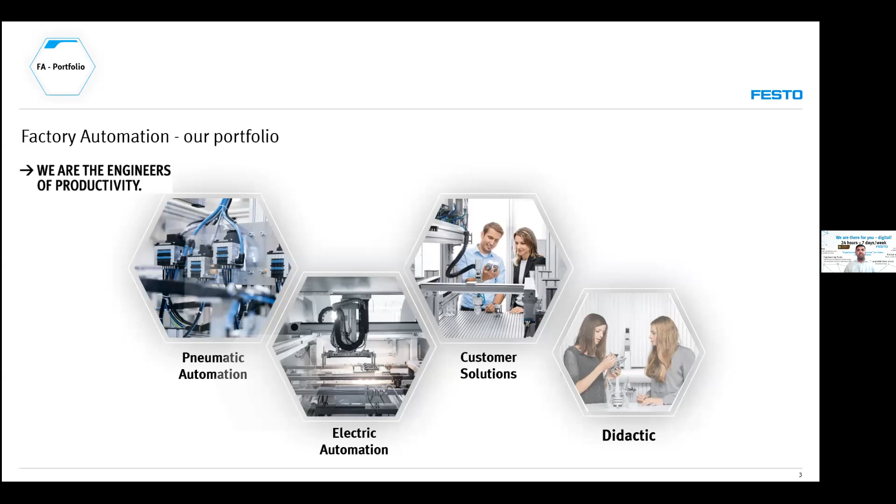So these are the main four portfolios that we have at present in Festo. Along with that, we cater to various business segments: biotech and pharma, food and packaging, automotive industry, technical education, electronics and assembly, medical technology, laboratory automation, water technology, and chemicals.

A large part of our growth comes from automotive and food, but our new business is developing very dynamically. Recently, the electrical market and light assembly have gained pace, and along with that, we have life tech products with medical technology and lab automation.

Not to mention, Festo Didactic with its qualification offer for Industry 4.0 always helps us develop not only the products, but also the people in the organization, who are trained with the help of our Didactic 4.0.

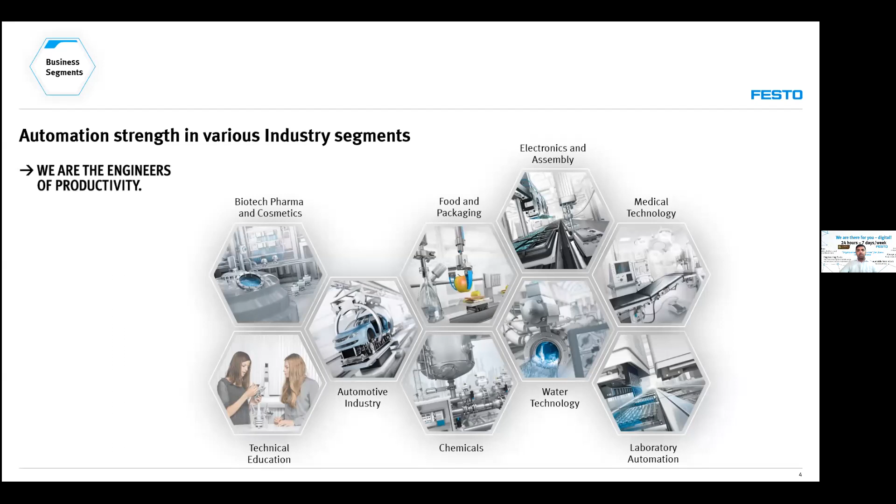So coming down, we can proudly say that Festo has now become a one-stop provider for factory automation. These are the various linear developments we have made. Initially it was catalog components - singular components like cylinders and valves - then catalog modules like valve terminals which can be configured. Then individual modules which can be integrated along with the PLC and operated. Then control panels and control cabinet systems, then high-speed handling systems, and then ready-to-install solutions.

When we talk about these control cabinets, high-speed handling systems, and ready-to-install solutions, they are included in the control cabinets individually, and they also take into account specific industrial requirements such as those in the food and automotive industries. Whatever standards have to be followed for a particular industry will be catered to accordingly once mentioned to our design department. The design is also influenced by local conditions such as weather and climate.

Along with that, it is not only Festo components that we use for these solutions - we also integrate third-party components so that it is operationally tested and delivered ready to install directly, where you can plug and play the entire system.

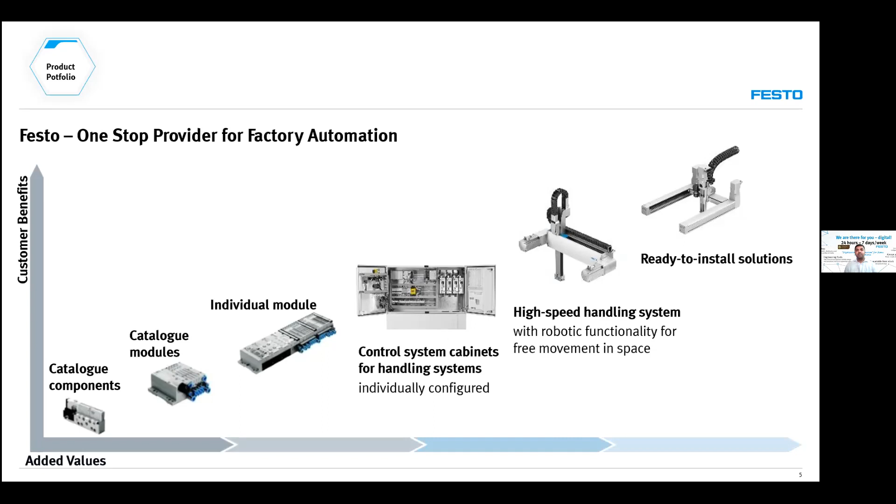So saying all that, I move to the second segment, which is our core concept of this seminar today, which is digitalization and automation.

First, to start off, any company needs its own digitalization strategy to move towards digital transformation and Industry 4.0. There are three basic steps that need to be followed. The first is digitization, which is basically the process of changing analog to a digital format. Then comes digitalization, where you use digital technologies to change a business model in order to provide revenue. So digitalization is the use of technologies to change a business model and provide new revenue and value-producing opportunities. It is the key process to moving towards a digital business.

Then comes digital transformation. Digital transformation drives the entire portfolio of your digital business into three different segments. The first segment focuses on external focus, which is your customers. The second segment is your internal focus, which is your own operations. And the third segment is the entire digital transformation, which involves digital businesses and digital business models.

So what exactly is this digitalization strategy? To be specific, this digitalization strategy focuses only on technology and not culture. Digital strategy is relevant to all the changes in the business model that need to be taken so that the business becomes digital. Setting down a strategy is the key component to any transformation process. Any business transformation process will require a specific strategy so that it ensures we follow the model to achieve the end objectives of the business. So that is what this digitalization strategy is.

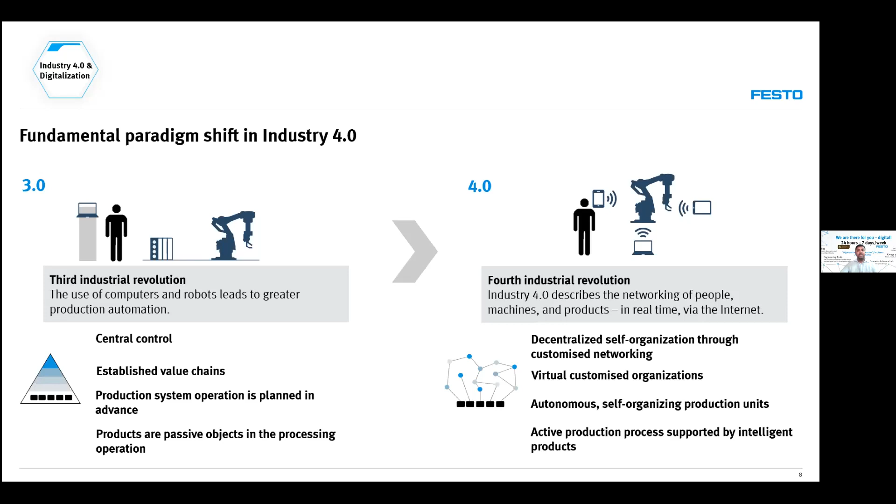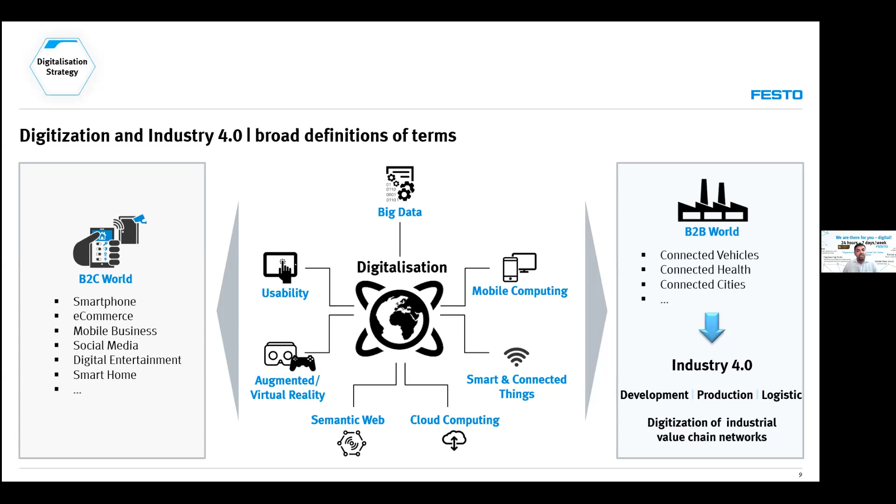Smart products are those which are clearly identified physical objects with intelligent and communicating abilities. A product with intelligence, networking, and communicating ability is termed a smart product. So our first direction is thinking in the way of smart products.

Through these smart products, we can be able to get smart services. What are these smart services? Getting generic here, these smart products related to automation will be able to cater to the following services.

We can assess the overall equipment effectiveness, process performance, product quality, energy monitoring, manufacturing performance, and production traceability. These are some of the smart services which help in the next process of the business, which are combined offers. These smart services are always there, but then they can be combined.

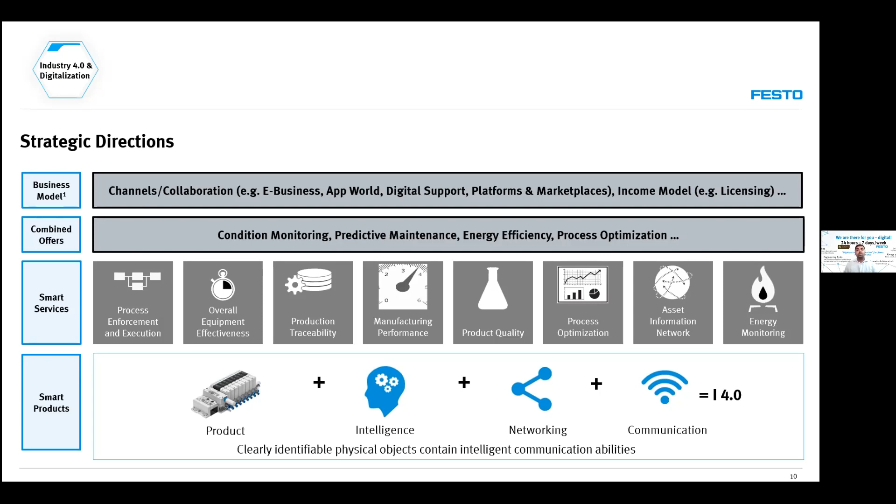Coming down to the first step of digitization. As I mentioned previously, digitization is converting analog to digital. This would be our first step towards the transformation from Industry 3.0 to Industry 4.0.

Industry 3.0 had products, then field devices and control devices, then stations, work centers, and enterprises. The main challenge was the field device getting interconnected to the control device. The product was isolated, the field device was isolated, and the control device was also isolated.

Now what do we have to do for this interchange? The same physical objects and equipment are now fitted with sensors, actuators, and integrated intelligence. So these become integrated systems.

Once the integrated systems are equipped with networking technologies like internet communication, machine-to-machine communication, wireless communication, and semantic description, these integrated systems become cyber-physical systems.

Once they become cyber-physical systems, we introduce new IP connectivity which can connect to the internet. So these cyber-physical systems now become smart products because they have the ability to communicate, network, as well as do their own functionality.

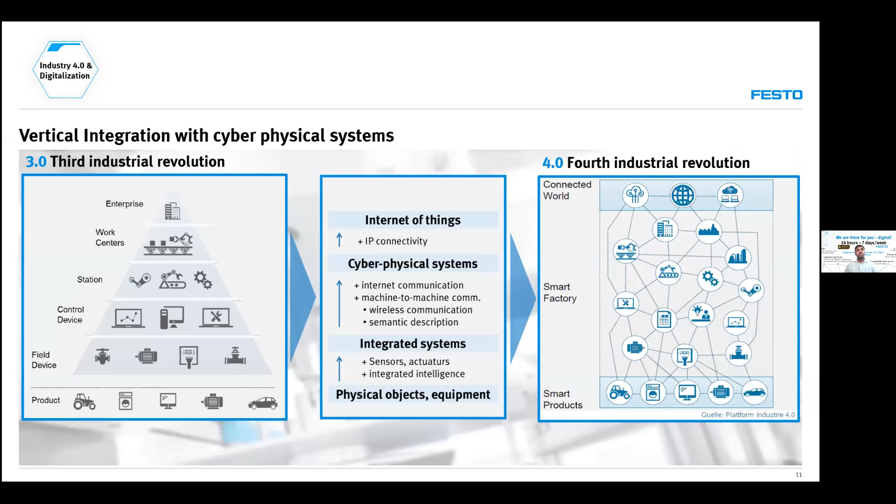So the transformation from Industry 3.0 to Industry 4.0 is all about smart products. The smart products used here have the ability to interconnect, whereas ordinary products in 3.0 are not able to interconnect and had to follow a definite hierarchy.

With smart products and interconnectivity, the hierarchy has to be configured by the user himself so that he can attain or reach whatever path he wants. So it's all about interconnectivity in the meaning of smart products.

Then the use of smart products and interconnectivity is what intertwines to become a smart factory. This smart factory can then be used to connect to the external world, and these become new business models generating new revenue for customers and organizations.

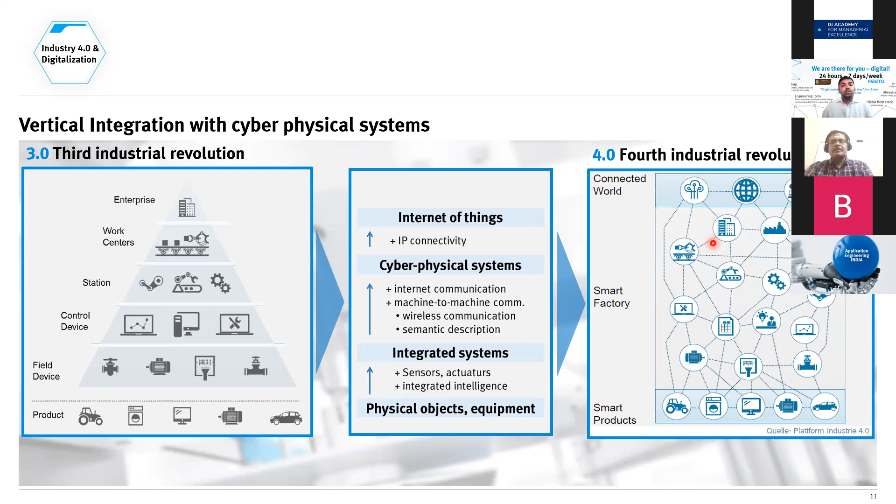So in order to do that, what exactly do we need with the help of our digital infrastructure? The transformation takes place from products to smart products.

Whenever there is a smart product, there is connection and integration along with IoT, the Internet of Things. We have an IoT gateway and certain libraries required for the smart product to communicate to the IoT gateway.

A brief description of this IoT gateway and the smart services will come up in my next slide. What we're basically planning to do is take all the raw data and transport it to an IoT gateway with the help of libraries and protocols such as OPC UA.

Once transmitted to the IoT gateway via OPC UA, this IoT gateway uses an AMQP telemetry communication to send it to a particular dashboard.

This dashboard can be user developed, developed using our software engineers within our organization. With the help of the dashboard, we can collect vast amounts of data, which can be used for visualization as well as data storage.

Once that is done and we have all the data, we move on to historic and aggregate data, which can be accessed globally.

Right after the IoT gateway, we'll have so much data coming into our systems that we might need to move our platform to the cloud. That is where this IoT gateway helps us.

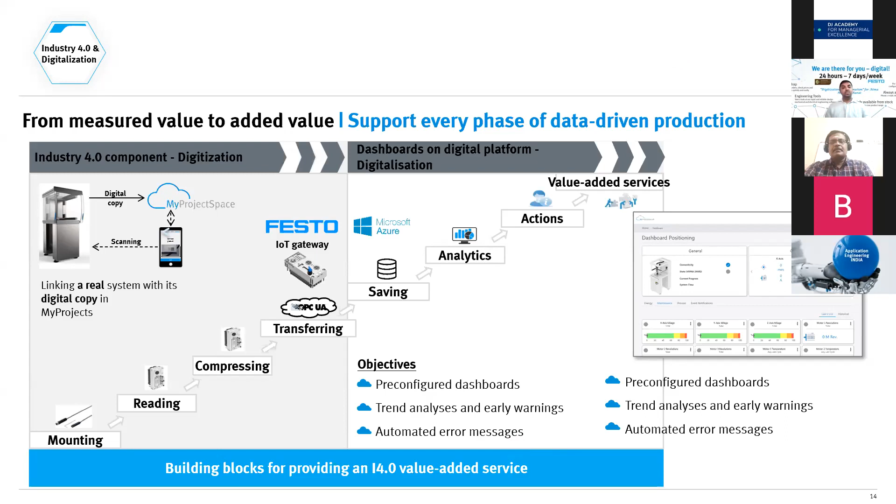So what is the benefit? Digital transformation, as you see, is more about people rather than digital technology. As I said in the beginning, once we embrace this digitalization, what are the benefits that we get? It is a long-term investment in productivity and efficiency, and it secures us through growth and innovation leadership.

As you can see, we can embrace this digitalization with the current portfolio. With digital products and services, we can have new business models. We can have a digital customer journey. We can set up digital infrastructures. We can build our own value chains. These are the various benefits that we get with the help of digitalization in the industrial value chain.

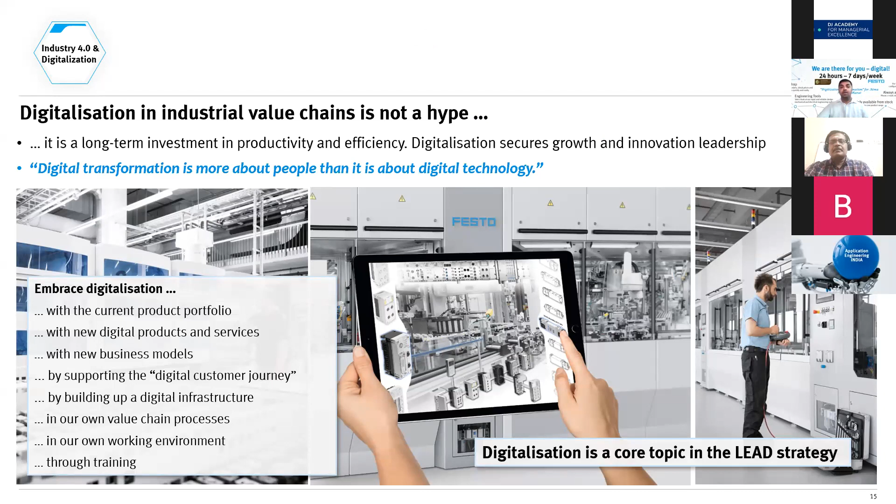What is the benefit to our customers through this digital transformation? Here you have a digital journey which enables the customer to make contact through numerous platforms.

We can have a touch point through ePlan or eClass. We can have a touch point through Google. We can have a touch point through various social media platforms like Facebook, LinkedIn. The customer can also have product-related data on YouTube.

Once this touch point takes place, the customer can also search. He can select products. He can size products. He can configure products with the help of the website, the internet platform. He can have different tools available with the associated product.

Those tools help them in searching the catalog, where they get all the 3D data and 2D data, enabling them to design and configure systems properly.

Then when it comes to the purchase department, it is very useful for them when it is going to be a rebuy. When they buy a product they have already bought in the past, all they have to do is give the part number, and the costing along with delivery time would be communicated to the purchase department through online and digital software services.

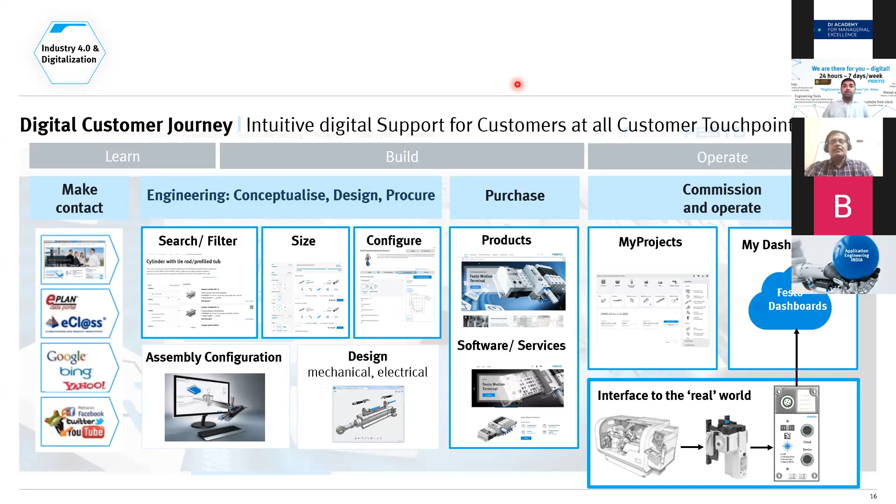So coming down to business models, this would be one of the business models that you can create with the help of the Digital 4.0 journey. So as you can see, you can have an app world, an application platform where you have your own products that arise out of the cyber-physical transformation that you have made.

And there can be n number of apps and many types of apps that can be developed for catering to the needs of your customers as well as your internal customers. So it can be mobile apps that can be accessed through tablets, Android, iPhones. It can be cloud-based and web development apps for motion analysis and data analysis.

It can be desktop apps for dimensioning, simulation, engineering. It can be PLC-based apps for smart press, smart configuration, condition monitoring, smart programming. It can also be firmware apps for plug and play, for force distance control, condition monitoring applications.

So there are n number of opportunities that are available once we have this transformation from digitization to digitalization, and then in our journey towards digital transformation.

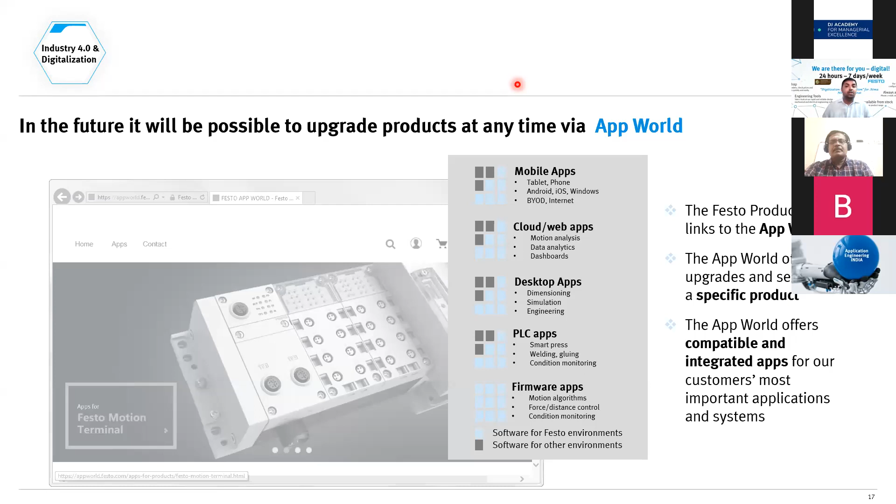So this is what digital transformation is all about. As we already told you, digital transformation is not about the products, it is about the culture of the business organization. So as you see, it is mainly driven by forming a separate business unit like electric automation or IoT business unit.

So what that business unit would do is develop IoT-enabled products, embedded softwares, the latest technologies that are involved in device data. What are the latest connectivity options that are available? What are the major software suites that have to be procured or developed in order to cater to our digital business or digital transformation business?

Next comes your digital products and services. So what are the apps that we have already built? What are the capabilities of those apps? How are those new business models going to arrive? What are we going to do with those business models? How are we going to promote them? So that would become a new digital business.

So the third thing would be digital infrastructure. Once we are ready for this digital transformation, we should be able to have a firm digital infrastructure. We should be ready for the cloud. So this would be hybrid and scalable.

So these infrastructure processes vary from your IT strategy. IT strategy is majorly about upgrading your IT systems and upgrading your information technology systems, whereas this digital strategy is totally different.

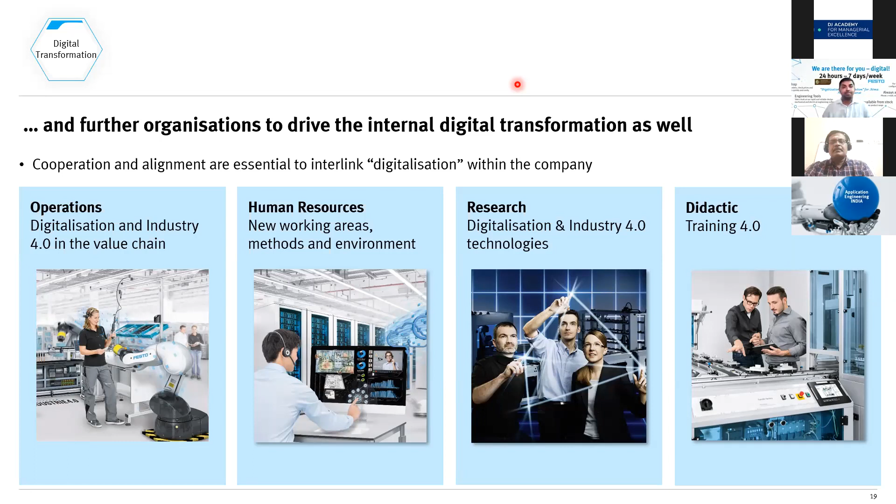So with this, I have a small application or suggestion on why an interconnecting network of things benefits everyone. This is a scenario we face in our day-to-day lives: the traffic signals presently there. These signals were mainly designed for one main reason, to prevent accidents.

Now, what if we bring an intelligent cyber-physical system to these traffic signals? We can achieve the following capabilities. Once this becomes a cyber-physical system, it acts according to data, which comes from various parts. A person sitting inside his car can also access that data coming from this cyber-physical system, so we can foresee that there is more traffic at this particular signal.

So if we have almost reached the signal, we can brake optimally, which improves energy efficiency. Then if we already know there is so much traffic at that signal and it would take more time, the car can choose another route, which is adaptation.

Then we can have a separate business model if that cyber-physical system can say that at this point in time there will be no traffic always. So we can have a green corridor for traveling at that particular time through this signal.

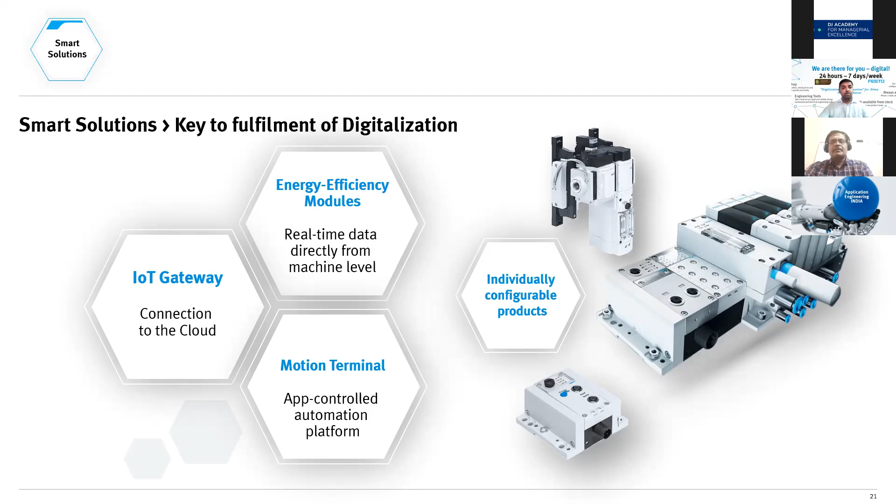Let us start off with our energy efficiency and digitally monitored technology. As you can see here, compressed air is under control with the help of this energy efficiency module. It is an intelligent combination of a service unit. A service unit is nothing but your filter regulator unit. So what we basically do here is add intelligence and integrate it along with the flow control, a pressure regulator, and a pressure switching valve.

Along with the pressure measurement device, ultimately what happens is the normal filter regulator unit that you use on your shop floor becomes a cyber-physical system by integrating all these additional components.

Then after the addition of these components, that's happening. So if you see, it is more than a conventional service unit by now. We are actually intervening in the air supply, and we are measuring at the same time. Automatic monitoring also takes place once the flow control and pressure regulation happens.

So here, it is not only the module that is suitable for energy efficient machines, but it can also help us collect data and stay connected with a simple connection of sensors to the PLC. So how it can be made to work is something like this.

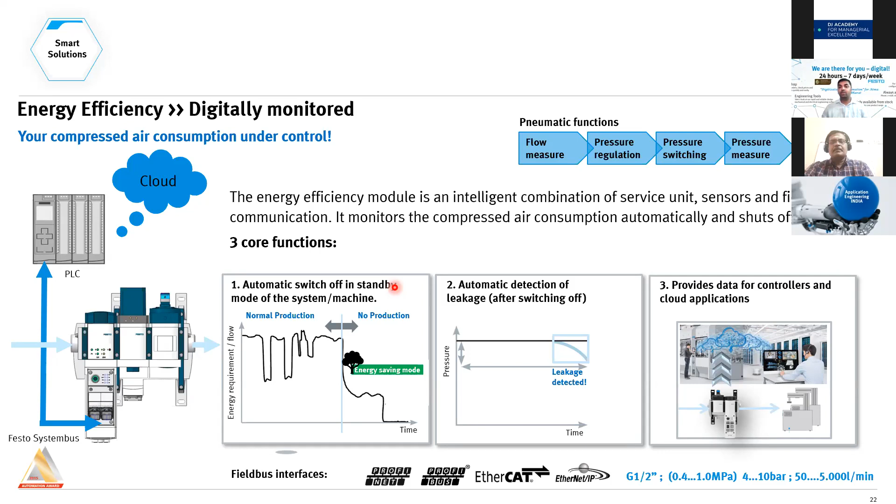All the data collected here is then fed to the controllers for cloud-based applications. After collecting the data and feeding it into the cloud-based applications, what do we get? We get a new business model.

As you can see here, we can take control of the total pressure supply, what is happening in the air consumption, how much is the total flow, what are the total air savings for that particular day, and what is the actual pressure it is operating on.

There are numerous data points and parameters that we can see with the help of these digital dashboards. Digital monitoring is also possible with the help of graphs or predetermined set point graphical items.

Along with this, we can also see the production that happened yesterday, last week, last month, and what were all the major breakdowns that were happening.

So these are various touch points that these digital dashboards can help us with, in terms of visualizing data and correcting our processes in order to bring down energy consumption and improve efficiency.

This particular thing is not only for this service unit, it can also be used for servo motor controllers and dashboards. You can see what is the link voltage in your servo motor controller, what is the torque in your motor shaft, what are the various statuses, what is the position of your electrical axis, where it is positioned, and what is the current status of your controller. All this can be monitored with the help of these digital dashboards.

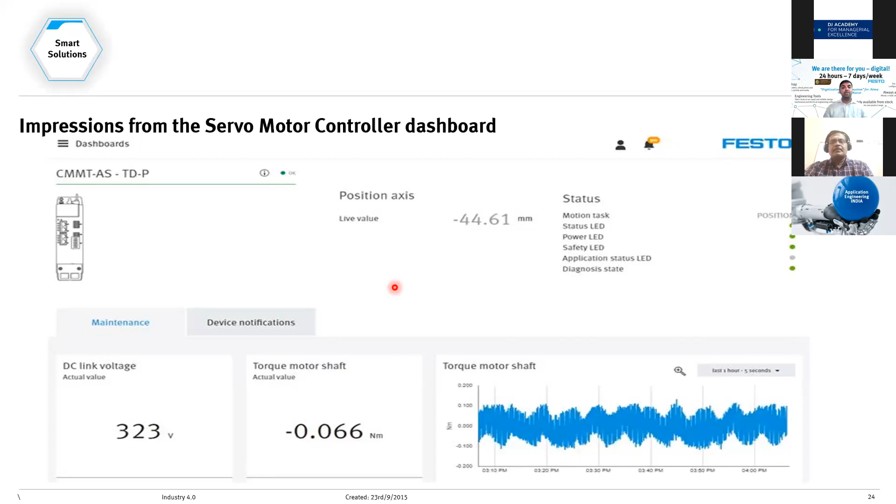It is not only through these specialized modules that energy efficiency measures are taking place, but also through other means. In organizations, you have application engineering departments which help you in sizing machines and tools so that it helps in enabling your energy efficiency measures.

Going digital makes system design and component layout easier. You have hundreds of components that need to work out optimally, and going digital will help put them together and work correctly.

In order to do that, we have to do engineering and simulation just to find out the right solution, which will help us with key data. So when selecting a product, if the right automation solution is found, it can be helpful for energy efficient engineering and configuring data for automation.

So how do we do that? On the product side, we can bring about energy efficiency in many different ways. The first thing would be to reduce friction.

One thing would be to choose the right components with the help of, for example, a motor with a holding brake for long standstills, then you can reduce weight. For example, if you're sizing your robots or Cartesian handling systems, the main thing would be the payload that you're going to operate with. So once your payload comes down, you will have an optimum selection of products that can reduce weight and enable energy efficiency measures.

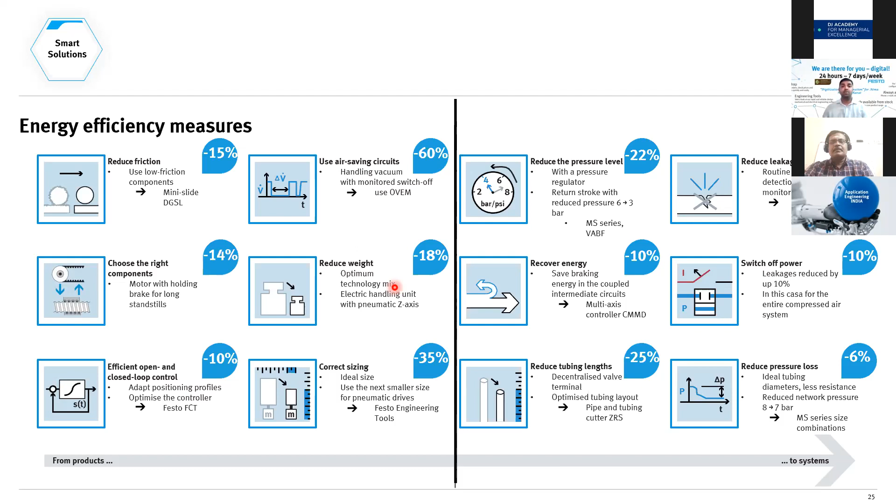In the long term, if correct sizing is made, for example, to move a mass of around 12 kgs with a stroke of 250 mm, what is the difference if we choose a 40 mm dia cylinder versus a 32 mm dia cylinder? If we choose the correct sizing with a 32 mm cylinder, we can save up to 34% in terms of energy savings.

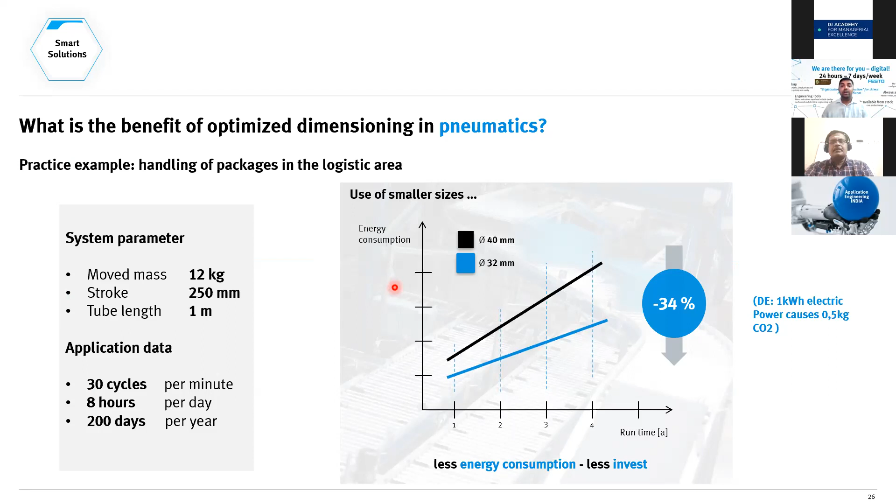So how are we going to achieve this energy savings in terms of valve terminals? Earlier we had the centralized installation and valve terminals, which were up to 60% efficient and channel cost reduced by 50%. Earlier we had an individual valve for individual cylinders, then we came up with the concept of valve terminals with centralized installations. Now we have decentralized installation systems, where we reduce cycle time up to 30% with very short tubing. Space has reduced up to 70% and air consumption has reduced up to 50%.

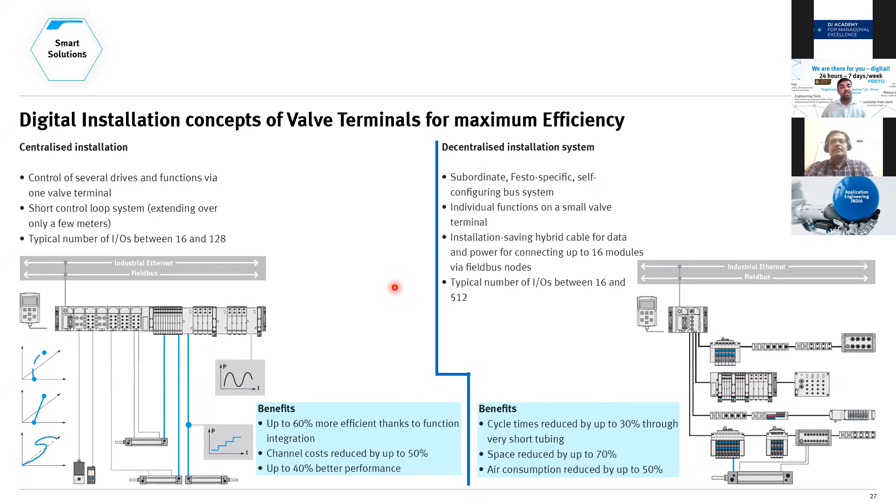So what are these centralized and decentralized installation systems? A centralized installation system is nothing but all your connections going directly to the centralized PLC or centralized system. It is one logical processor operating to control n number of cylinders. Then came the modular system, where we had a separate module helping control these valves and valve terminals, placed very close to these valves and valve terminals.

Then comes our decentralized system, where we have individualized monitored valve terminals and logical control units. A logical control unit can be placed quite adjacent to your valve terminal in the decentralized system. All this can be communicated to a centralized server unit, which can in turn communicate to your PLC with the help of field bus systems. Then comes your hybrid systems, which is a combination of modular and decentralized systems. So in today's world, with the help of decentralized and hybrid systems, we are able to reduce our carbon footprint through these energy savings.

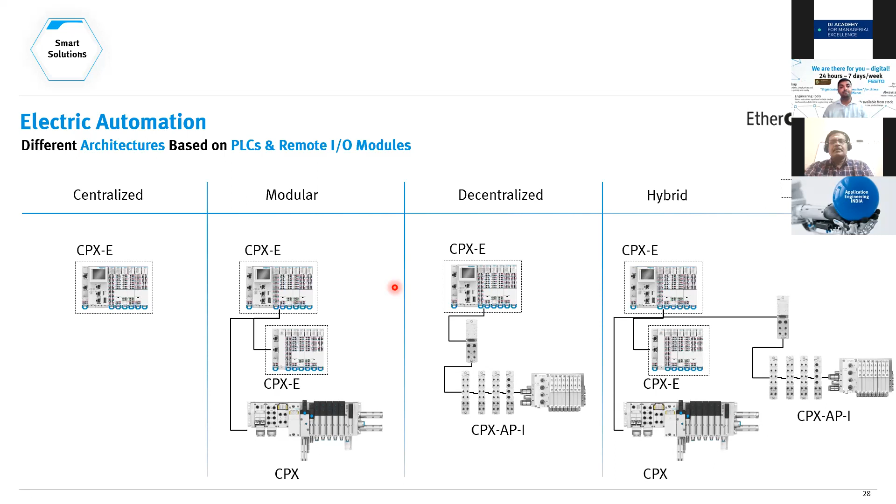So now what are all the data that we serve? What are all the data required for all these processes? With the help of these products, we can get parameter data, that is how the system is going to be set up and configured, what field buses it requires, what various connections it requires. Then we have diagnosis data, that is what is happening in the system.

Is the system on or off? Is there any malfunctionality? Then we have smart data, which are the condition counter of your coils and actuators. All this helps in determining if your valve is on or off.

Then we have process data, that is the inputs and outputs. The PLC gives the correct status of your input and output, whether the input signal is on or off, whether there is an output signal going out from the PLC or not. Then we have asset data, which is nothing but your total product information. Asset data has your product key, your product information, like what is the product, what is the part number of that product, what are the technical specifications of the product.

So these are various data that a particular cyber physical system or module has, that can be sent to the cloud in order for us to send it to the dashboard and monitor things properly.

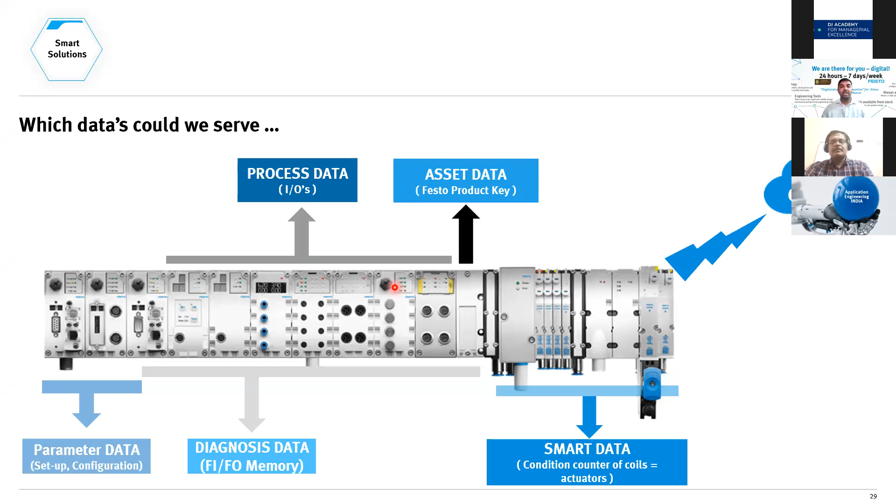Then comes our IoT gateway. This IoT gateway automatically discovers the various devices connected to it over the motion terminals, the energy savings module, or the handling systems. It communicates to this IoT gateway using OPC UA.

Once the data is collected to the IoT gateway, it communicates to Microsoft Azure. This is a separate cloud platform available from Microsoft, and all your data can be serially collected and stored in Microsoft Azure with the help of AMQP, a telemetry communication protocol.

Once your data is collected and stored in Microsoft Azure, you can take it to various cloud platforms like MindSphere, Festo Cloud, or other cloud platforms with different cloud protocols. The main thing to consider here is the communication model: OPC UA and AMQP.

Once that is done, the condition monitoring libraries help us filter and aggregate the interesting data required and send it to the cloud. The benefit here is reducing data costs and optimizing network traffic.

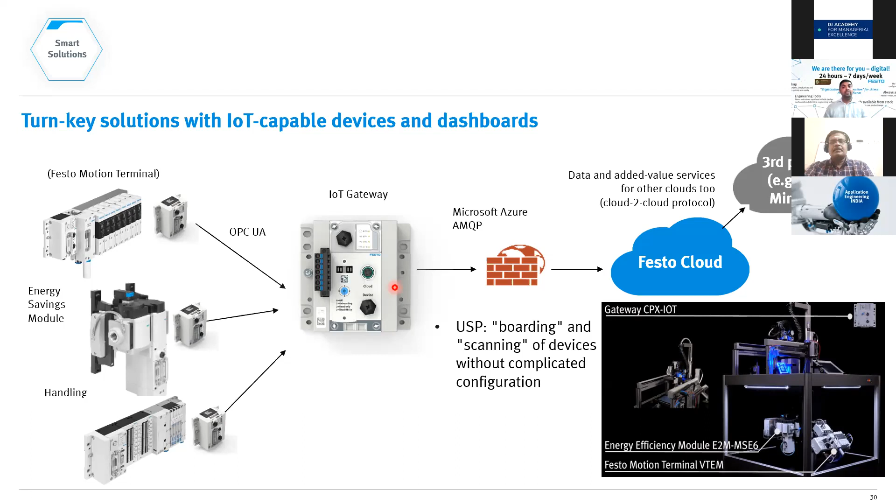Then comes the question: is Industry 4.0 and digital transformation only for new machines or new products? Well, what these products can do is, with the help of retrofit, provide a gateway or door opening to an entire new world of digital transformation.

What we can do is retrofit our existing shop floor and machine tools, irrespective of the number of machines. It can be multiple halls or different sites.

Energy monitoring can take place with the help of your FRL system. You can collect all the data, and it helps you reduce your carbon footprint, not only for new machines being built on your shop floor now, but also for machines that were working in the past for more than 30 to 40 years.

So all those machines can be retrofitted with these smart devices, and ordinary internet and Wi-Fi is possible with these smart devices, which help in the transformation of these machines into digitally transformed machines.

And also your conventional assembly systems can be retrofitted in the same way.

It is not very hard in the conversion of these machines that can be retrofitted, because existing field bus systems and existing controllers with PLCs remain, and hence it is only the field devices that make a difference, so you can retrofit existing shop floors at no additional costs.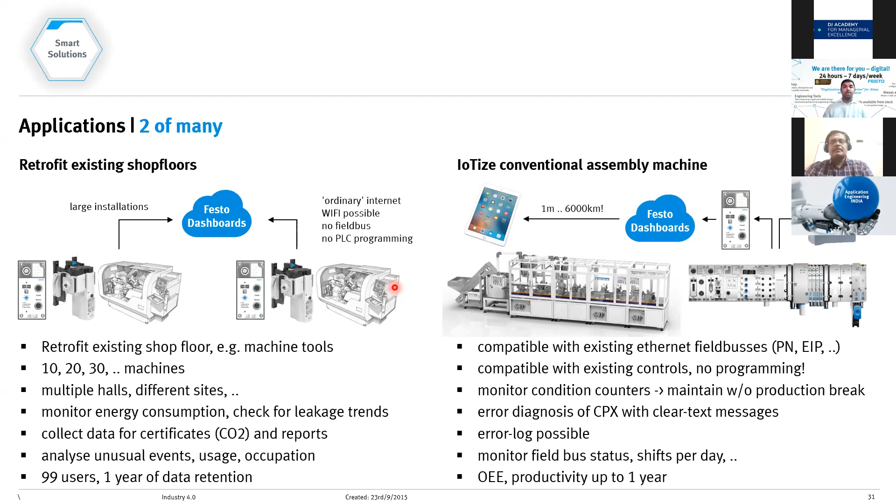Now, coming down to one more product which combines the simplicity of pneumatics with the advantages of electric automation. This is a plug-and-work solution where you have ball screw systems and tooth belt axes that come internally with a combination of stepper motors.

These are plug-and-work solutions where once you determine the stroke lengths and speed, it has an input module that can be programmed on the system itself. Once you input your stroke lengths and speeds, it can operate on a point-to-point basis as per your input, without additional external servo drives, as all the electronic components are integrated into this drive.

So this is a complete solution for simple movements between two mechanical end positions. It does the same functionality as your pneumatics, and no special expertise is required for commissioning. It comes with a programmable HMI where you can program your stroke length, your speed, and your communication.

It can also directly connect to your PLC, and with the help of the PLC you can command and run this particular product. It also has capabilities of digital input/output and IO-Link, so through that you get the advantages of a pneumatic system combined with electric automation.

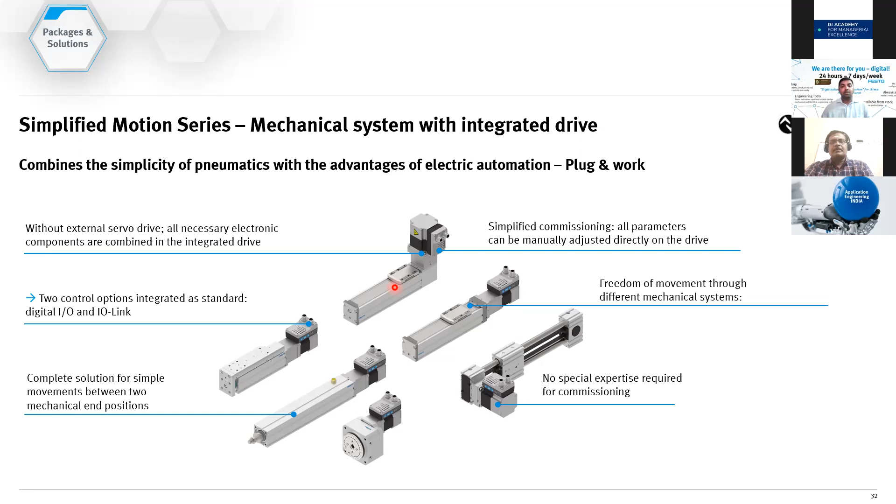Then coming down to the various architectures that we have right now, previously everything had to go to one particular place and all the connections had to go there. But now, as you can see, it has a lot more capabilities.

Depending on the module combinations, the PLC can be configured. It can be purely a remote IO system, purely a control system, or purely a remote IO system without any inputs or outputs. It can be only a PLC for motion control or for running servo motors and controllers. So all this is possible in this present world.

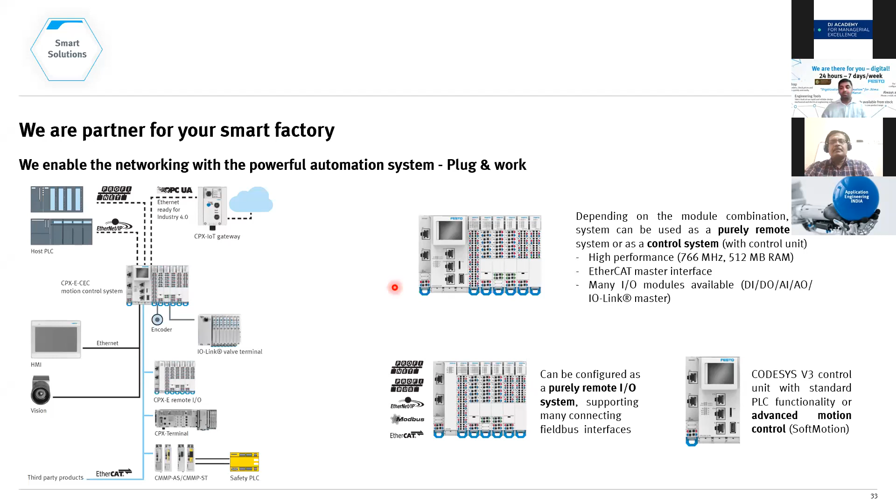So coming down to our last segment, which is on IO-Link. As you can see, it can have the capability to communicate wireless. And when it comes down to exchanging data without cables, the first preference would be IO-Link through WLAN.

With the help of IO-Link, we can send serial bidirectional data from field devices to your control unit. So as you can see here, we have the field devices, which is the valve terminals. With the help of IO-Link modules, we can communicate it to your PLC, and from there you can collect data through your cloud modules. It can be used in all types of field devices nowadays, like sensors, actuators, and a number of mixed signals are also possible with the help of IO-Link.

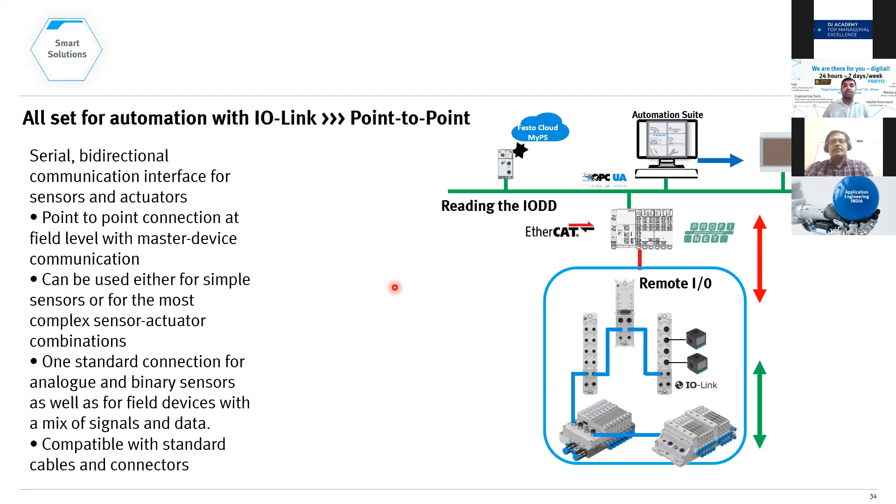So what are the benefits of IO-Link? Your parameterization is made very simple. Your investment is safe because these are standard products with plug and play capabilities. They have very less downtime and higher productivity. Less downtime in the sense, for example, if a sensor is malfunctioning and has to be replaced, we have these IO-Link master modules which directly connect to the new device and parameterize itself within a matter of minutes, so your downtime is very, very less, and it is very simple to install because the complicated wiring of the sensor actuator is not a major factor of hindrance here, which is the pure benefit of less downtime and higher productivity.

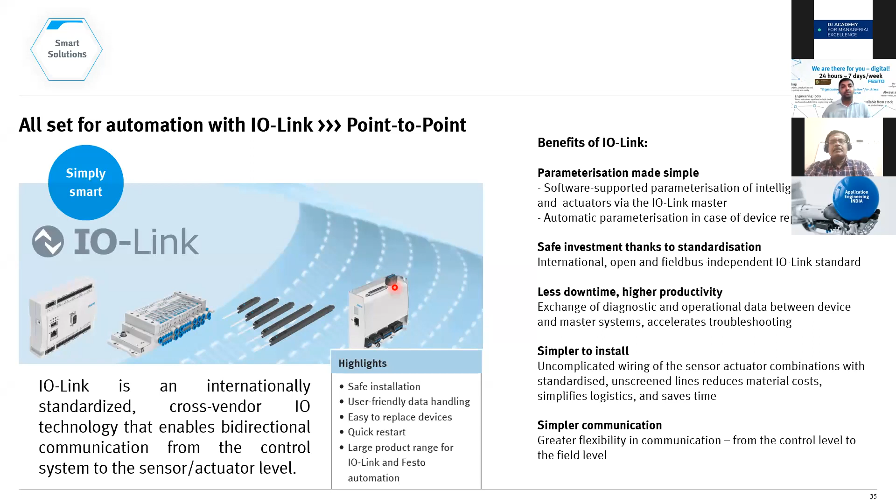Coming to our digitized pneumatics, the first product I would like to speak about is the digitized pneumatic balancer. In earlier days, we had zero gravity balancers, which had no safety in the first case, and a very skilled operator was required to operate that balancer, because whenever there were different loads, we needed to switch the pressure depending upon the load by the operator. So when loading takes place, there would be more load on the balancer, and when unloading happens, the load on the balancer is much reduced. Every time the operator had to switch the pressure depending upon the load.

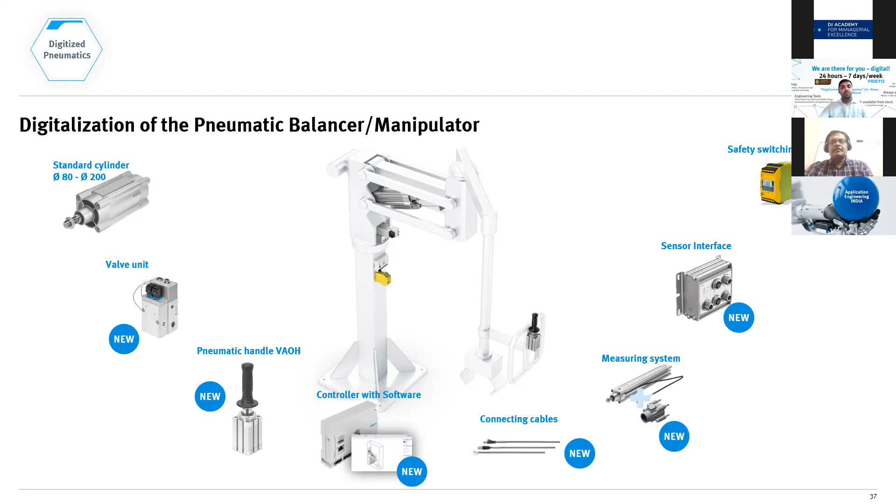So this becomes a really flexible closed loop system, and the operator's work is only handling. These components are suitable for all types of systems, including kinematic systems. This is the advantage we get from a pneumatic balancer which is digitized. These cater to n number of applications, as you see here, such as handling of door panels, axles, tires, batteries, etc.

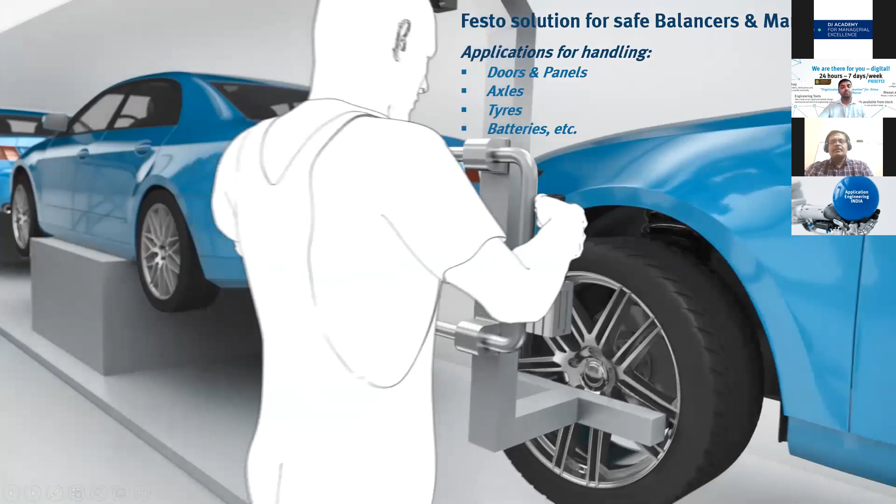Coming down to the next topic on digitized pneumatics, we have this motion terminal, which can position freely over the entire working stroke. This motion terminal is the first of its kind in the world, which has a valve terminal pneumatic system that is digitized and controlled through directional motion controlled apps.

Along various functionalities like direction control, proportional direction control, soft stop, proportional pressure regulation, eco drive, selectable pressure level, and leakage diagnostics - it is one hardware that eliminates over 50 components. This single hardware can perform the entire capabilities of those 50 components.

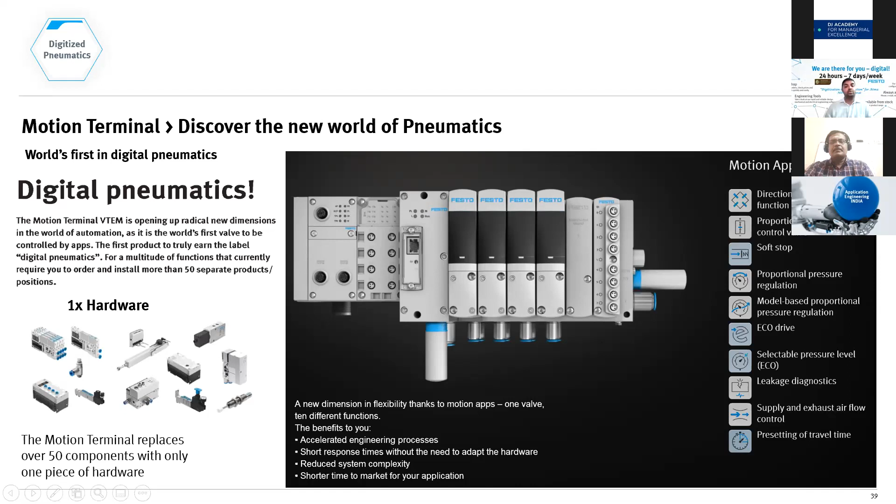So what are the advantages of digitized pneumatics? Complex movements are possible with high functionality and condition monitoring abilities, and various positioning can take place with the help of digital pneumatics. But in standard pneumatics, it is easy to operate, but there are overload protections, reliability and sturdiness - it all has to be designed in prior to achieve the functionality.

But with the help of digitized pneumatics, even the strengths of electrical automation and pneumatics can be combined, and it is capable of delivering very good results. Electric automation, on the other hand, has greater precision and complex movements with variable positioning profiles, low energy consumption, and condition monitoring.

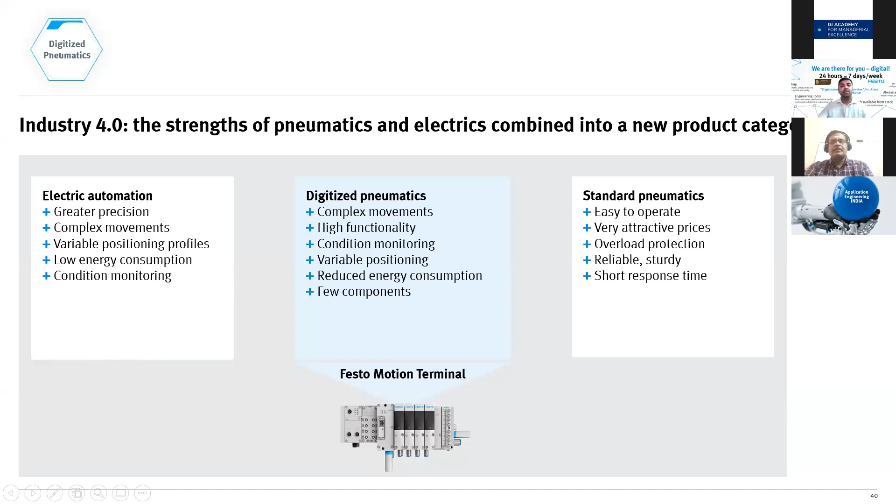So what are the motion apps that help in digitizing these pneumatic processes? The motion terminal has model-based apps that help in various functionalities. The first would be proportional pressure regulation, where we control the feed force of a particular system. The feed force of the component is directly controlled with the help of this motion app, so that only with the help of tube length, tube diameter, and cylinder size, the motion app directly controls all the parameters, setting the cylinder to move with such force that the required feed force is reached.

Then we have the soft stop function. Generally for a soft stop application, in earlier conventional pneumatics, we used shock absorbers to prevent damage to the end positions as well as achieve smooth soft stop of the cylinders. But with the help of these motion controlled apps, this soft stop is directly achieved by removing the shock absorbers, and the motion control app directly takes care of this functionality.

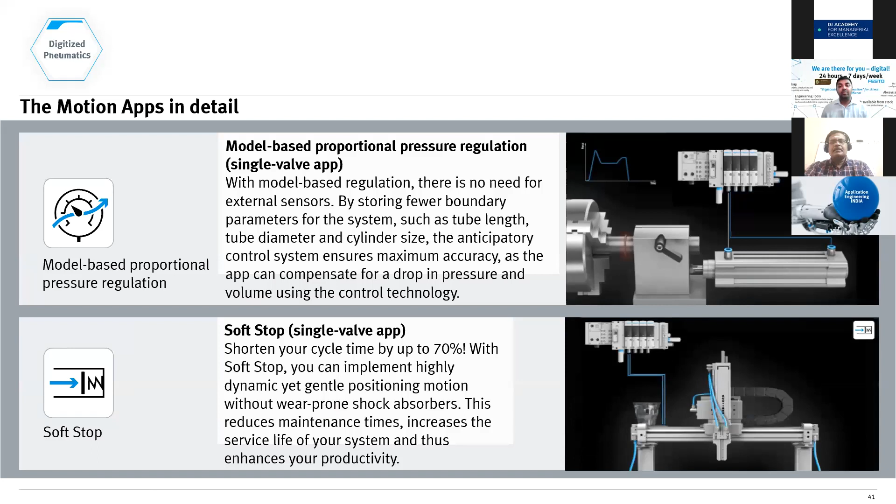This video demonstrates the following: now we do not have any shock absorbers, and you can see the difference - now we have a shock absorber. The vibration and flexibility of the system remains the same by removing the shock absorber and connecting it to the valve terminal, as you can see here. In fact, it is more efficient than shock absorbers, shortening your cycle time by 70% and also helping with energy savings.

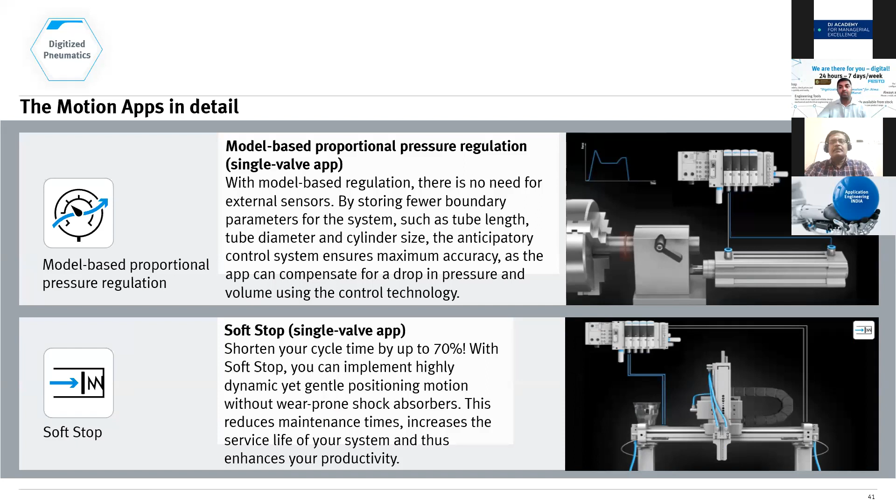Coming down to the third possibility of what couldn't be done in conventional pneumatics: positioning. As you can see here, a pneumatic cylinder is freely positioned over the entire working stroke with limit values of speed and acceleration. This was never possible earlier, but it is very smooth and with great efficiency and energy saving, happening only with the help of this motion terminal through the app.

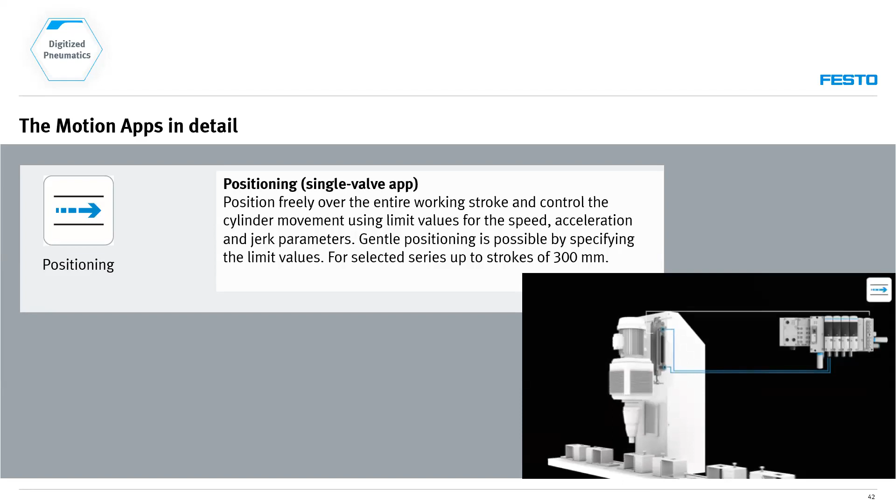Coming down to one more product, which is a servo press - this can have n number of applications in the pressing sector, used for clamping, pressing, and n number of applications. As you can see here, it is completely software controlled. The various parameters like force control are realized with the help of a closed loop system with the force sensor, and this additionally has a function with pressing programs which can be parameterized.

In addition, it can be connected to a dashboard with the help of software. This software can deliver different types of graphs like your force-time curve, with which we can see all the parameters that are happening during the pressing. This is one particular product that can be taken as a plug and play device, because it comes as a ready-made modular assembly and system.

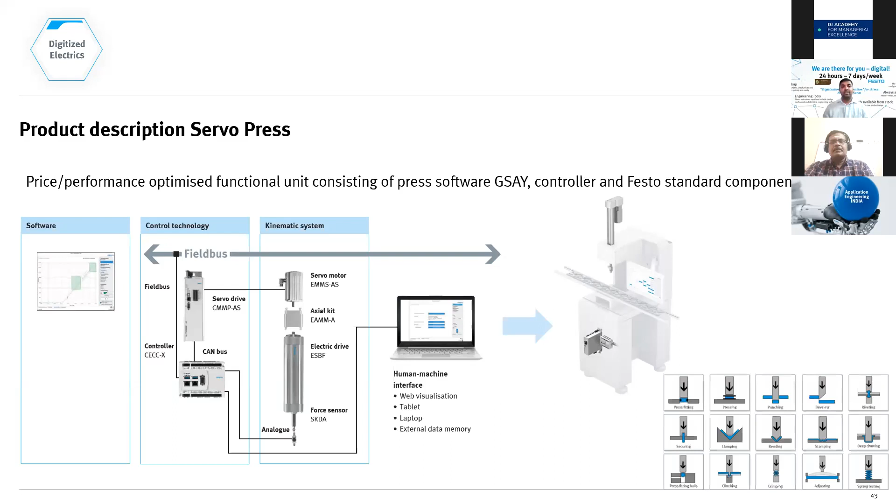Then coming down to the digital business models - this is a digital business model. With the help of all the data that we have collected, we can design a maintenance tool, and the main aspects of the tool should target energy efficiency, predictive maintenance, and overall equipment effectiveness. Once you have all the data coming down from your smart products and solutions, the raw data can be taken in the form of an IoT gateway to the cloud.

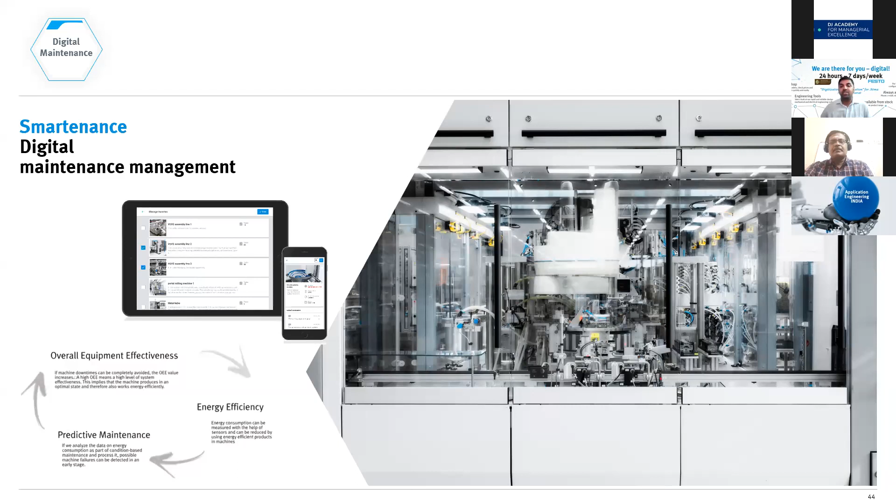From the cloud you can make applications where your shop floor control becomes much easier for optimization and energy savings. These are the three major factors that we emphasize in this tool: overall equipment effectiveness, energy efficiency, and predictive maintenance. So how was maintenance in the past?

We had a lot of printing to do in terms of maintenance schedules. It was very time consuming, and it was mainly reactive maintenance. Whenever a component failed, we had to do the maintenance, and we had to schedule preventive maintenance on a weekly or monthly basis.

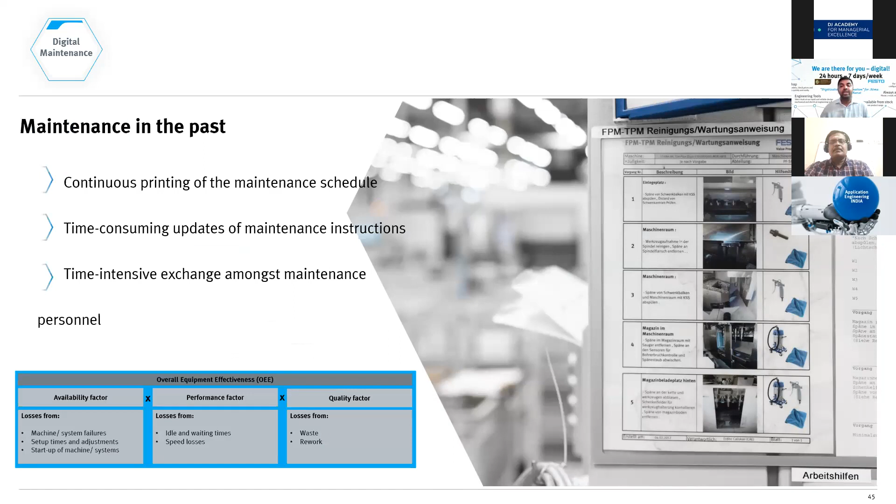But with the help of this Smartenance tool, we can do a lot on predictive maintenance, because this includes a logbook and incident management system. With the logbook, we can see which operators were allocated to which machines. With incident management, we can see if any incidents were reported due to maintenance, and we can schedule maintenance beforehand.

Every shift did not need a shift meeting, because with the help of this app, operators can be allocated their respective machines through the app itself. Any incident reporting can be done directly with the app, so that all supervisors are alerted and can come down and attend. It's also a very time-saving process, so we can eliminate most shift meetings, which were only required for allocation of machines for operators.

And last but not least, these can be connected to your ERP systems and business system models. It can be connected to your SAP also, and from there you can take many data-driven decisions.

Coming down to Bionics, this is an integrated part of Festo, a separate department, the Bionics and Future Concepts department at Festo, where we have important functional topics like integration, miniaturization, flexible and adaptive systems, and how to operate machines intuitively, all represented with the help of bionic models.

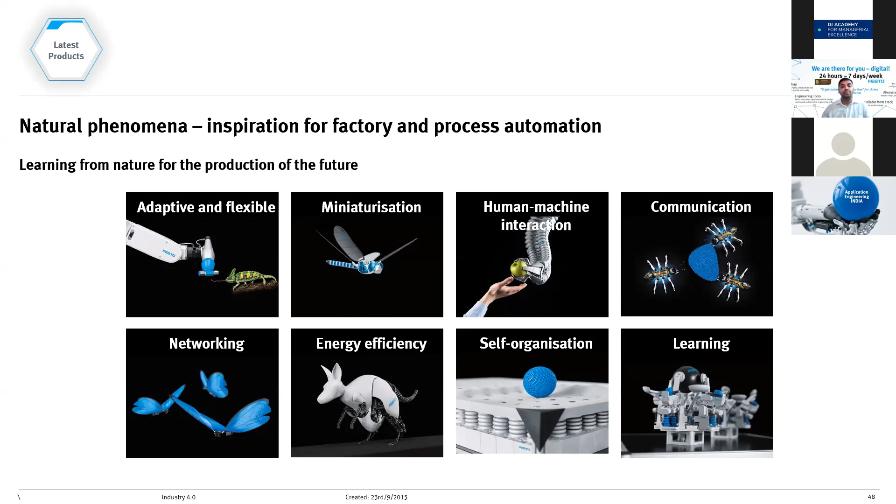So this is a flex shape gripper.

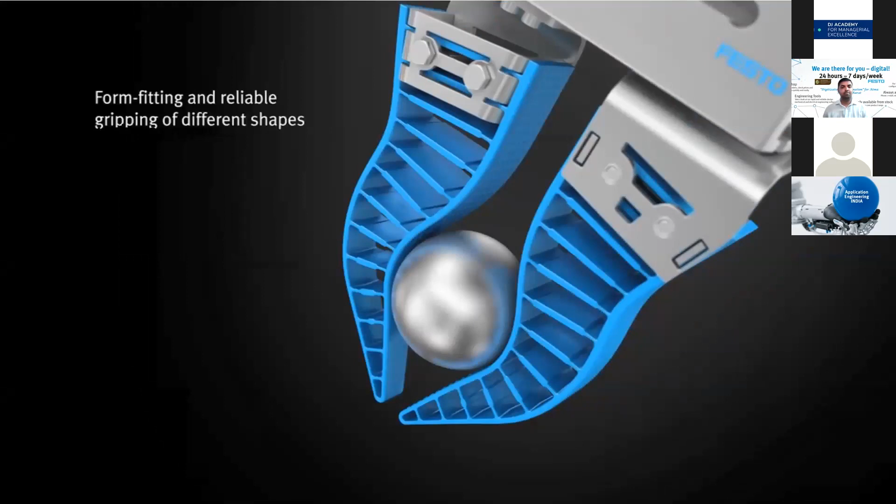Finally, coming to an introduction of our Festo Didactic. Festo Didactic is a world leader in providing equipment and solutions for technical education. On one side, Festo automation products improve the efficiency of your machines, but on the other side, Festo Didactic improves the efficiency of your people and organization through various training solutions.

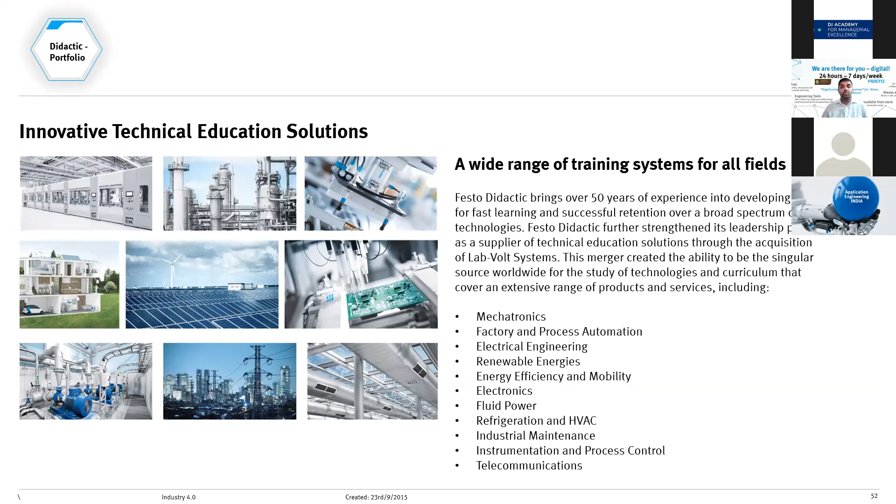We offer a wide range of training in systems of all fields, including hardware training, equipment, and conducting practical training courses. Our various centers are located at Bangalore, Chennai, Pune, Mumbai, Ahmedabad, and Noida. Training can be offered in topics covering fluid power, mechatronics, PLCs, electrical engineering, electronics engineering, renewable energies, and Industry 4.0 also.

These courses are generic and do not involve any components of Festo or Festo-related training programs. These generic courses also help people in sizing Festo products and components in a different way. But we also offer different courses covering pneumatics, hydraulics, PLCs, and mechatronics.